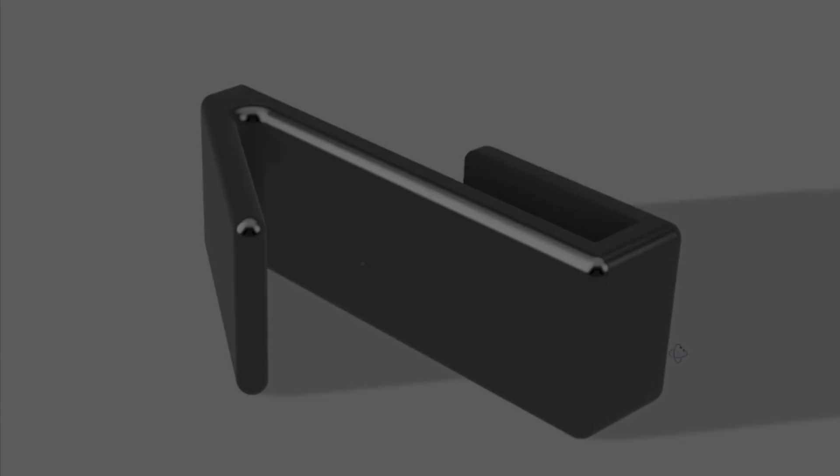If you're here, you're looking to start using Fusion 360. I have not used Fusion 360 very much, I've done a little bit of tutorial stuff on YouTube. I'll put some links to those guys' videos in the description because they've been super helpful.

A little bit of background about me: I am an electrician, but I do a lot of two-dimensional CAD work for electrical drawings and slab drawings for pulling conduit in concrete slabs. I've been off work for a bit, so I've been trying to find stuff to do, and I got a 3D printer and started designing stuff.

I actually started out with an application called Shapr3D on my iPad Pro with the Apple Pencil, but I just recently built a computer, and Fusion 360 is free for personal use, so it seems like a more long-term and more broadly useful skill to know Fusion 360 over an Apple app.

So from what I've learned, you can follow along with me. If you want to go download Fusion 360, you don't need to pay for it as long as you're not using it for commercial purposes.

And you can make some stuff for your home. If you don't have a 3D printer, you can send designs out to a 3D printing service and they'll send it to you. Obviously everybody's financial situation is different, but the Bambu and Creality printers are really pretty inexpensive, considering you can make pretty much anything your heart desires.

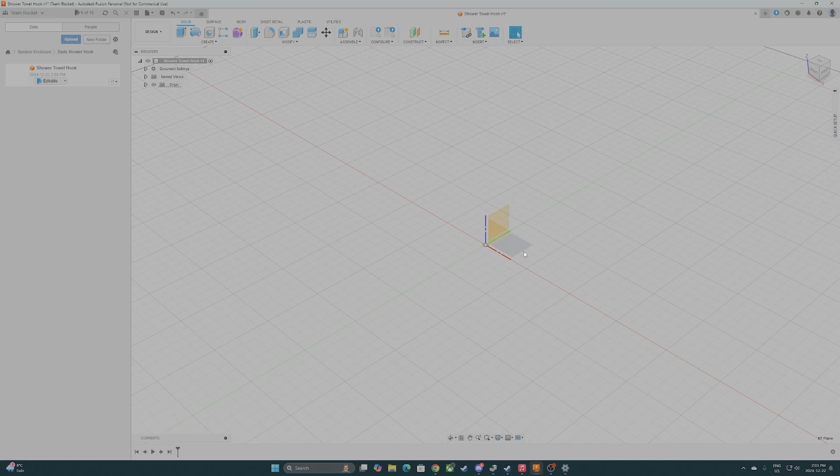So we're going to want to click on Origins, click there, right click, create sketch, and that'll put us into the top view, as you can see up here. He actually only gave me one dimension, which was that the glass is 8 millimeters.

So we're gonna kind of make a U-shaped hook that will form to that, so you can hook it on the top of it and hang towels up.

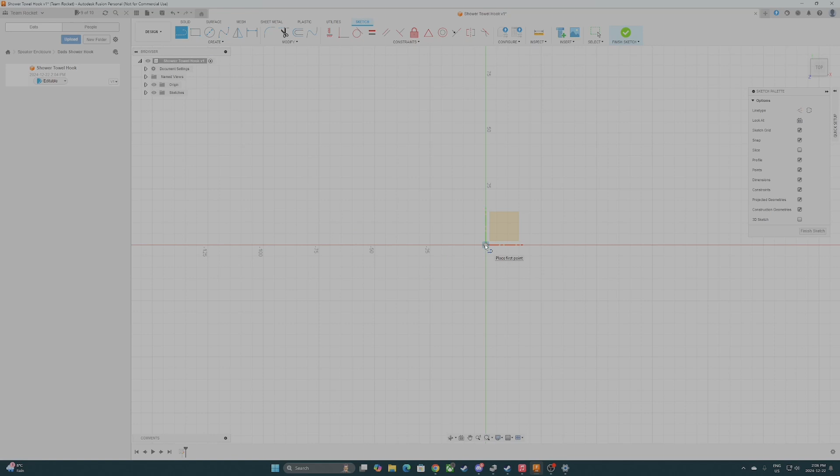Obviously, I'm not very good at using Fusion 360, so maybe we'll go for the line command, and we'll start from the crosshair, the planar crosshair here, and you'll notice I have snaps on, so you'll see it snapping to grids and center points as we go forward.

So just hover your mouse on the plane you want, the direction you want to draw, and the piece of glass is 8 millimeters thick, so I don't think the hook needs to be more than, let's call it, 32 millimeters. So you just hit that.

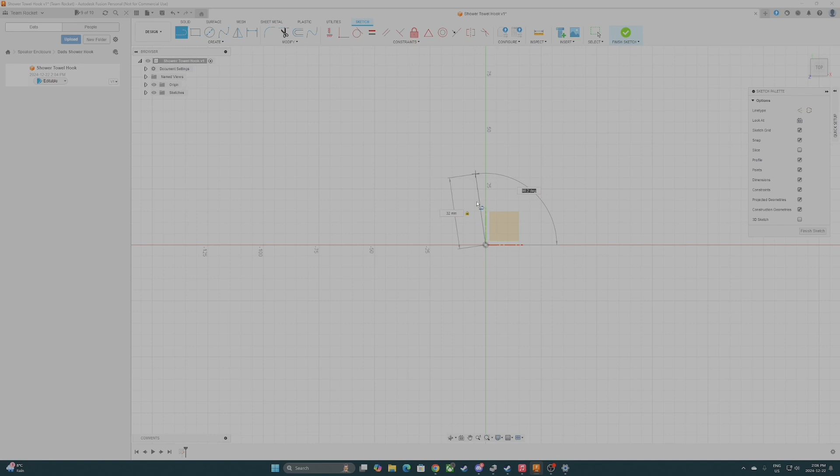You can hit tab if you want, and that'll lock the length, and then you can pick the angle you want. I think we want ours to be straight, so we'll just click there.

And then we need to pick a thickness, let's call it 4 millimeters thick. So because it's 8 millimeters of glass plus the two 4 millimeters, we're gonna go 16, we'll call it 16 millimeters. So we'll put 16 there, enter.

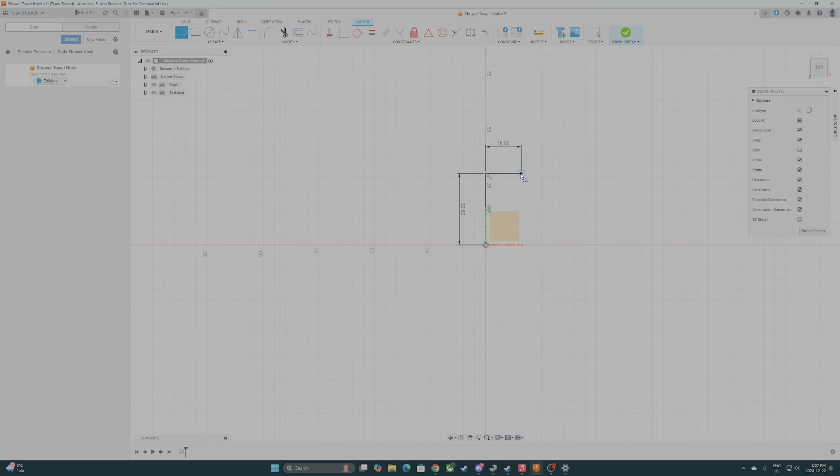You don't have to hit enter because you can continuously draw. And then we want it to come down maybe twice as long, so we'll call it 64.

So this is going to be the outside shape of it. We're going to have a hook come off here, and then we'll trace the inside of it.

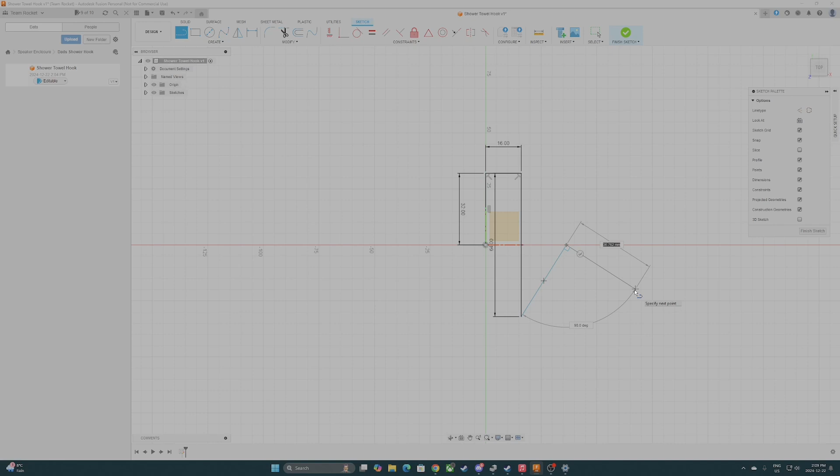So this is where that tab, once we pick the length of the hook we want, at an angle, we want it to come up to halfway. So approximately, that looks like a decent angle for that. We'll go ahead and click that. And since we said we wanted it to be 4 millimeters thick, we'll hit 4. Look at that. And then again, now we'll come down and we'll be perpendicular to that.

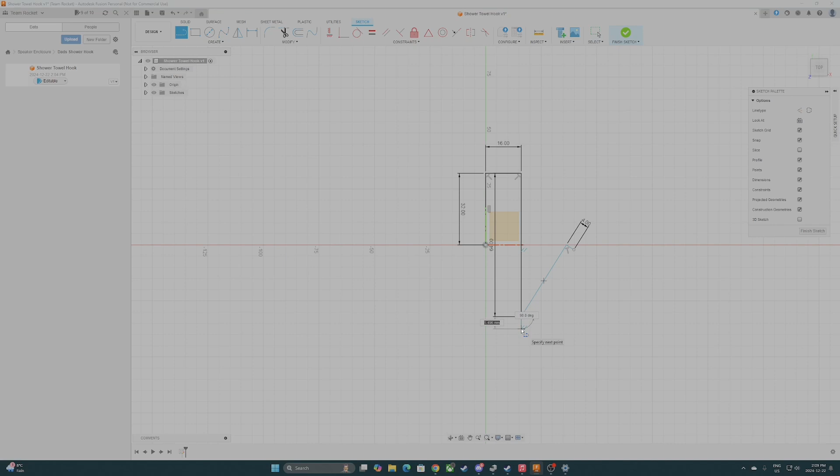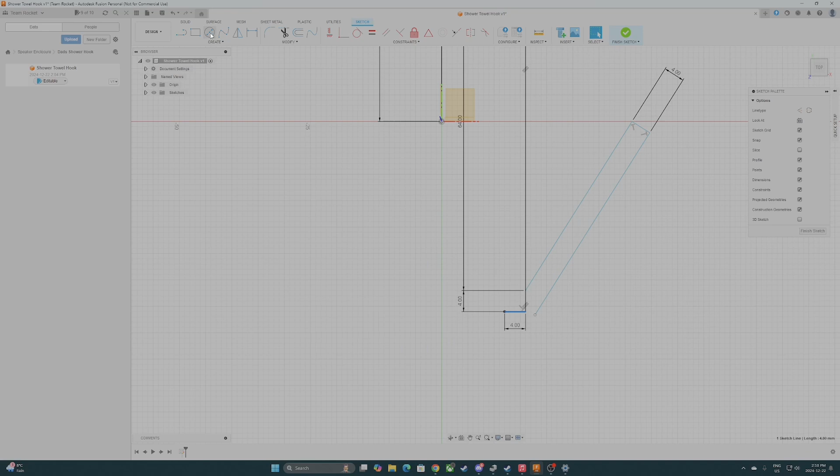This is where a little bit of math and thought can go a long way. We'll just draw a line down here, and then we'll come off of this point, and we'll go 4 again. And then we'll pull a line off of that's perpendicular, and we'll drag that line out till it's just drop it there. Pull a line from there and snap it into...

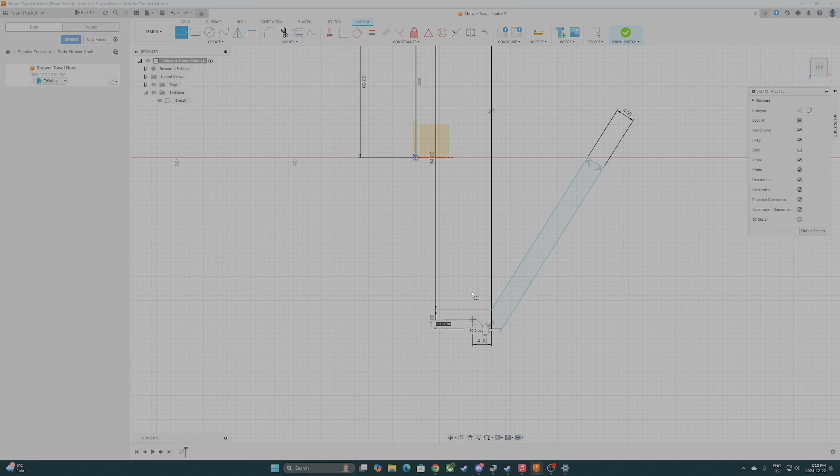Okay, so we've maintained the 4 millimeter thickness here. From the tightest point will be 4. Now we can draw a line and come back up. And since we went 64 up and we're trying to put a 4 millimeter thickness in, we'll go up 64. It still says 64. Okay, bad at math, go team.

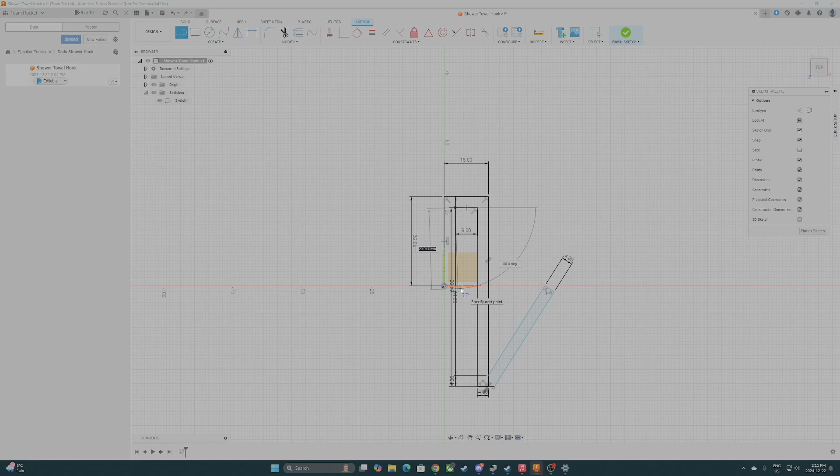So the top is 16. We want to take 4 and 4 out of that for this and this to get our horizontal line here. So we know the inside is meant to be 8. Now we can pull the line down, and that's now going to be 28.

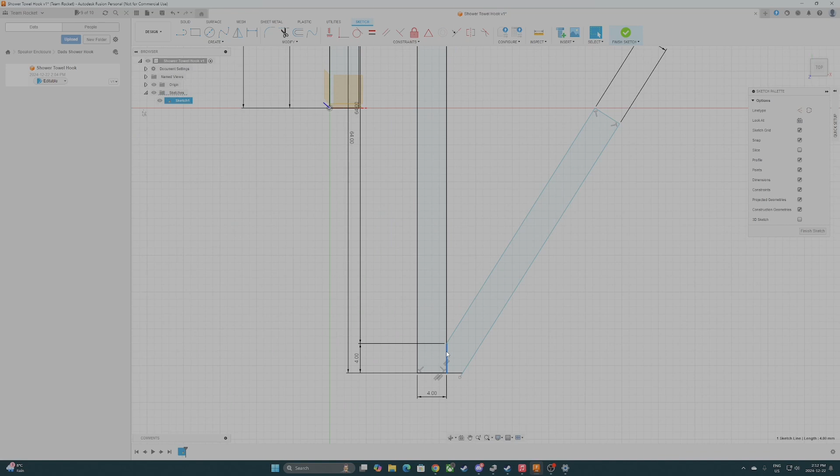Now you can see as soon as we snap that in there, we've got an inside. So the issue is this line, delete that, and now we've got one solid piece. So now we want to extrude it, and for that we can just hit E, and we can pull it out.

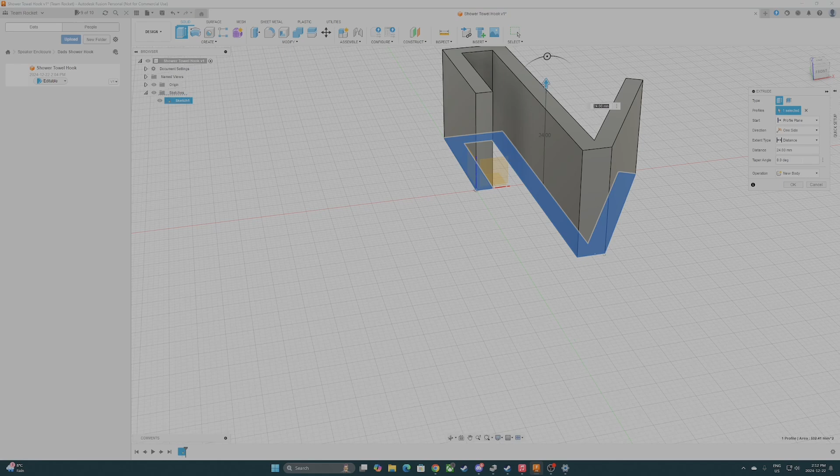You can sort of get a vibe for how thick you want it. I think 24 millimeters is probably good. Settings look all right. Okay.

Now we're gonna want to put some fillets on this, but I don't really want to fillet this inside, either of these inside corners, because I want it to fit fairly tightly to the glass, and the glass is pretty solidly cut, so I think it would be fine to leave that in there as unfilleted.

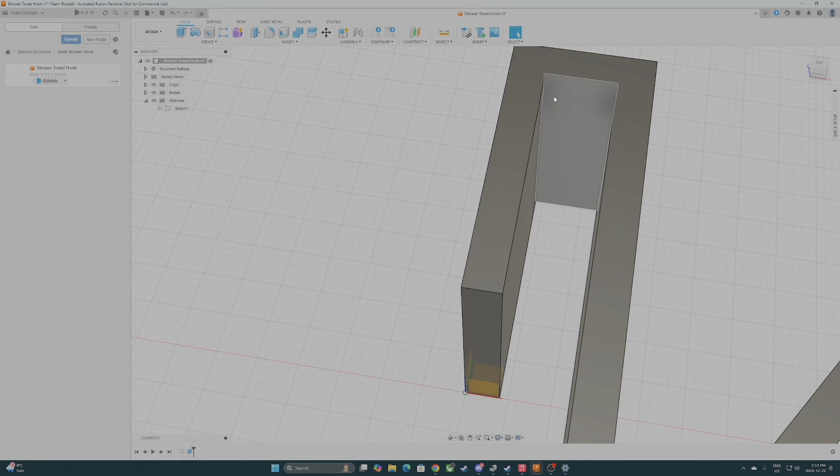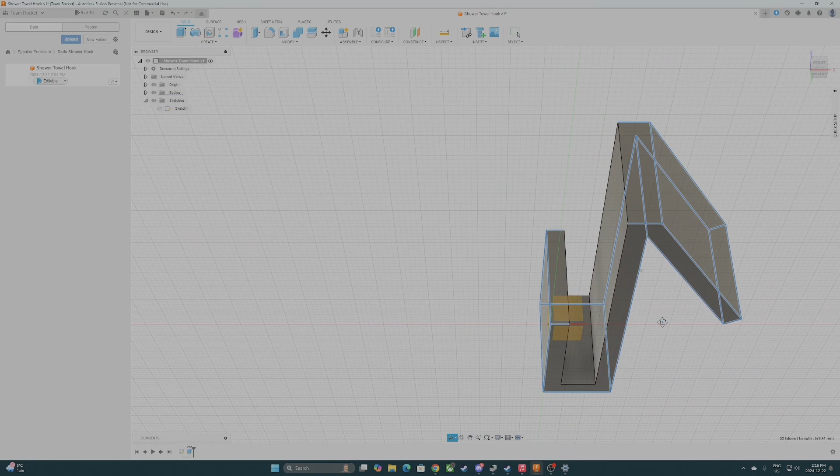So we're gonna have to go through and hold shift and click on all of our faces that we do want to fillet. I don't even want to fillet this whole inside because it's going to be touching the glass. So let's pretty much fillet everything that's not touching. It looks like we've got all the faces we want to fillet.

Nice, so now we'll hit F. Excellent. And we'll throw some numbers in and see what kind of fillet we get. One thing I learned early on when I was using Shapr3D, not that it was application specific, but the printer only has so much definition on fillets. So if you do a 1 millimeter fillet, it's not going to probably end up looking the way you want it.

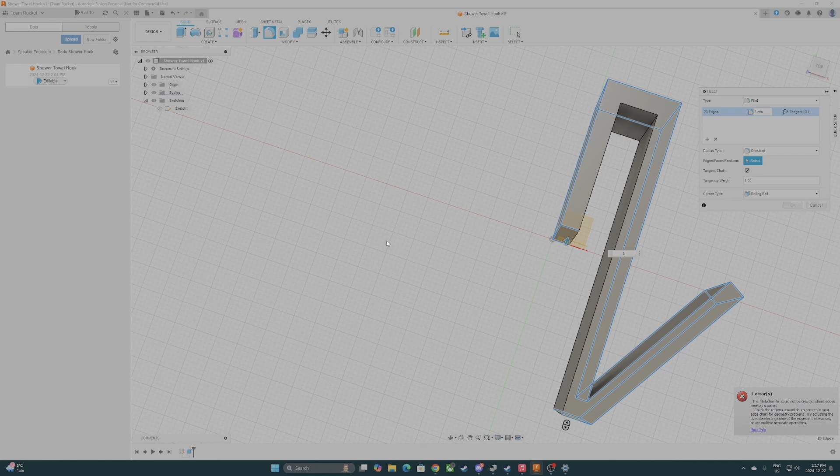So let's try a 5 millimeter fillet. Fillet cannot be created where edges meet at a corner. So it won't even let me do it. Perfect. Okay, so let me do a 1.

Let's go for a 2. Yeah. I like that. See, it stayed flat where it grabs the glass.

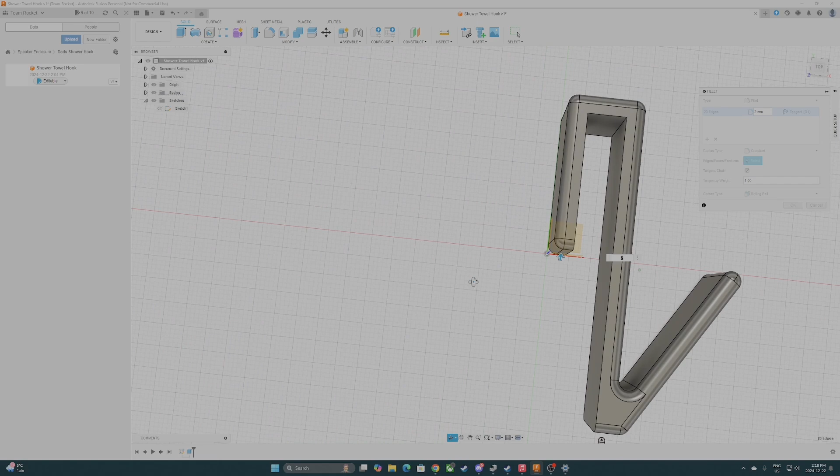Yeah, I like it. So now, first of all, we'll click OK. And we can turn the origin plane off. We want the body on. We can turn sketches on and off.

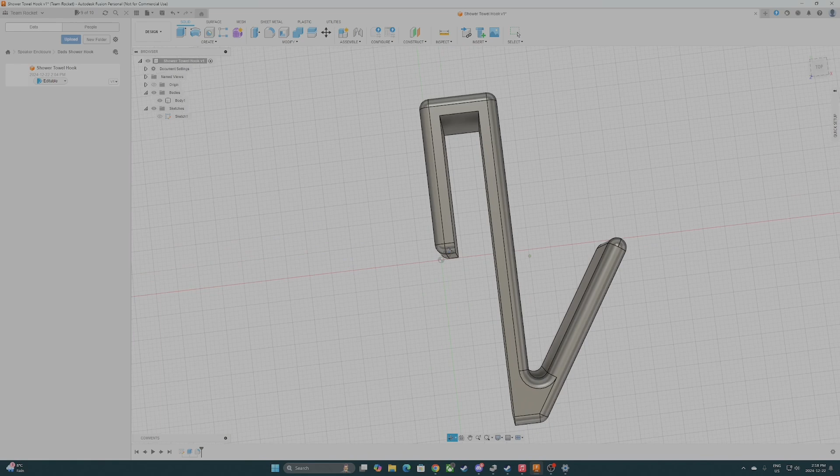And now if you want to see it rendered, stainless steel.

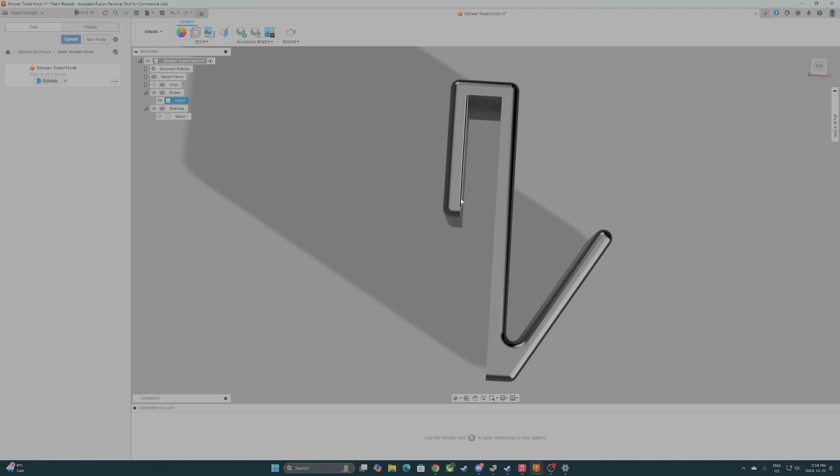So that's pretty much it. Now I can put this into my slicing software, and this is probably the best orientation to print it at, because your layer lines are going to cut through this way. So when your towel's on the hook, it's going to be forcing this to try to open up.

Whereas if you printed it at this orientation where the lines cut through, you'd see right here is going to be a really weak point, especially when you figure someone's going to pull on a towel here and it's going to try to split the layers right there.

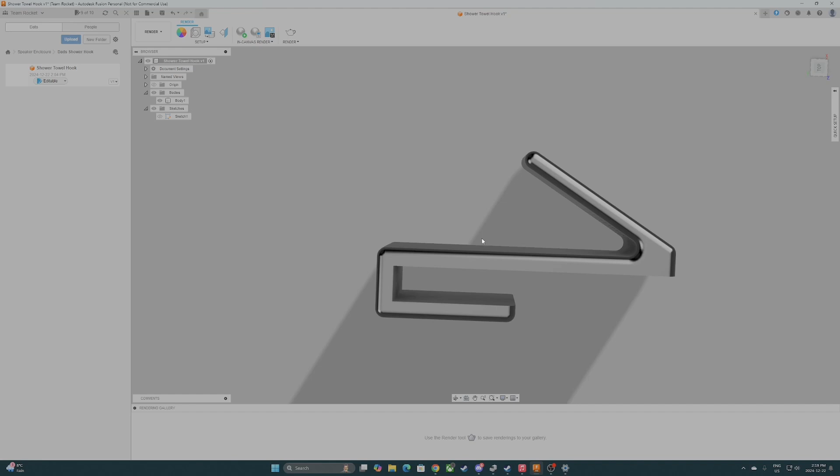Might not be a problem if you have really strong layer adhesion, but in my limited experience I find print orientation is really important, and often you end up having to design around the orientation if you don't want to split your parts in half.

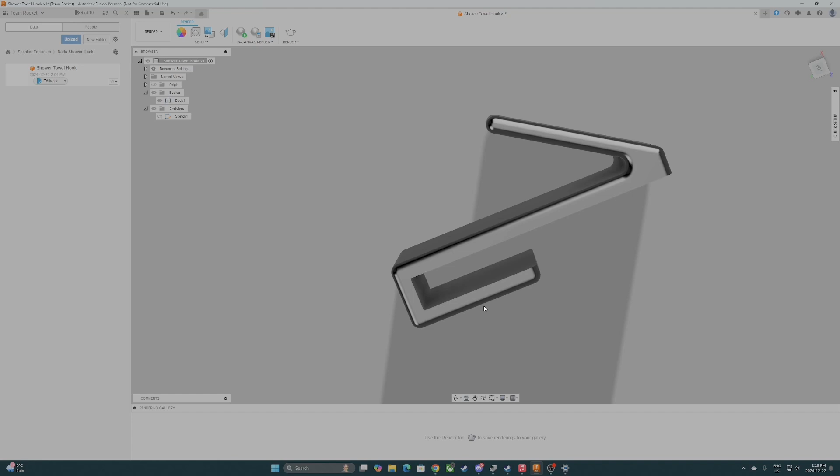For example, if this was unprintable without crazy overhangs and you needed a nice finish everywhere, you might cut this here and print it on its back with this face touching the print bed, segmented through here, and then print this on its back so there's no support.

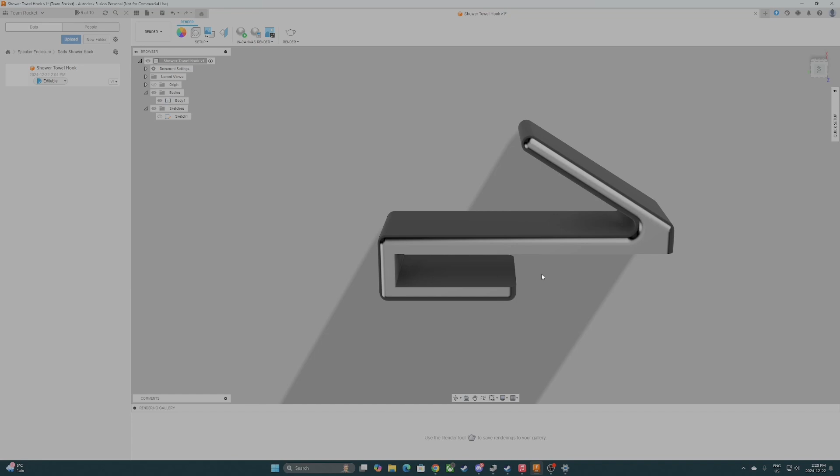Because if you printed this in any other orientation but on its side, you're going to need some kind of support and you're going to compromise on layer integrity. So just a thought for slicing.

So when we're done, don't forget to save. We'll call it complete V1, because who knows, we might do some changes to this based on how it prints and what my dad thinks.

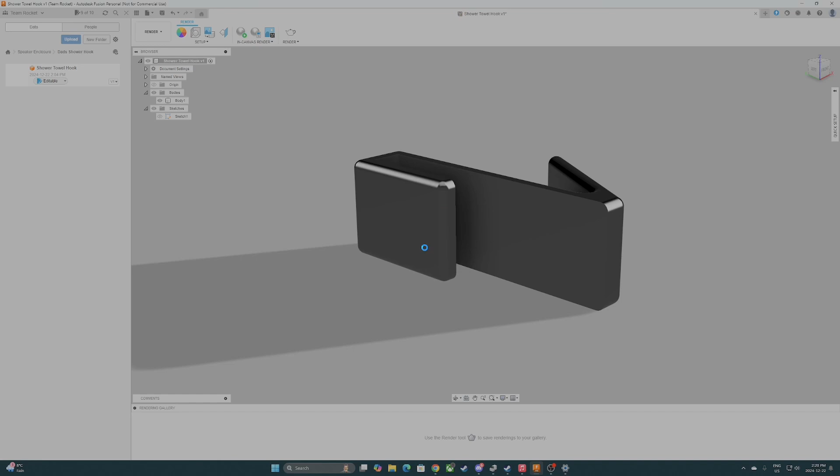Thanks for watching. The next part of this will be slicing it and a time lapse, and a follow up on how the print went. So thanks for watching.

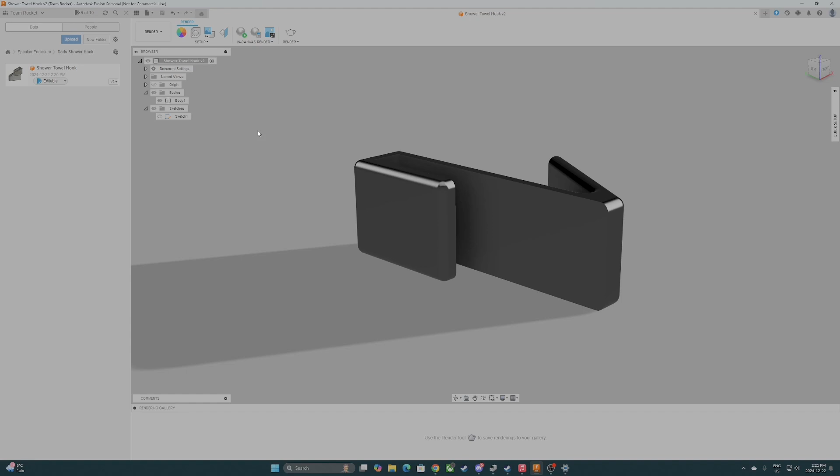So it's not that bad. There's obviously, the workflow of it is different to two-dimensional AutoCAD and even Shapr3D in regards to your history.

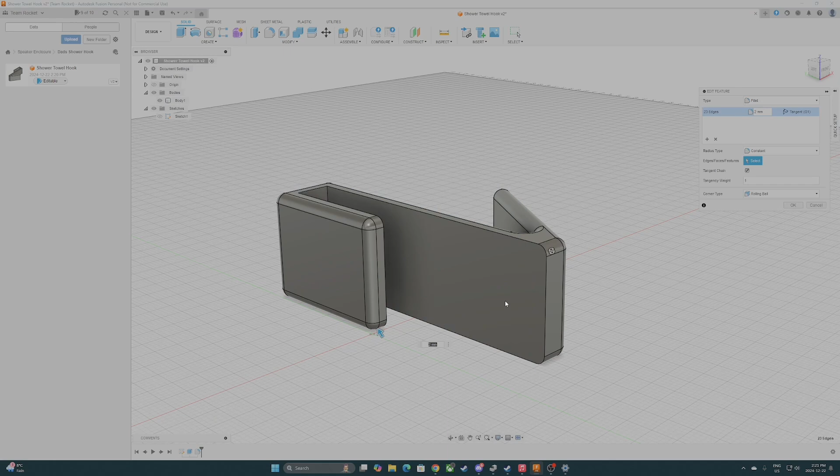For example, is a big one where we started with the sketch, then we made the body, then we did the fillet command, and that's one of the most impressive parts of using Fusion 360 to me - you can right click on this, edit feature, and go back and change the fillet. So it's really not hard to change stuff.

Obviously there's a limit to that. If you start changing drawings, then some of the later steps you took, as your project gets more complicated, you're going to start breaking stuff.

But at least Fusion 360 will give you a little pop-up, and your timeline item that has a problem will shade itself yellow, telling you you need to fix it. And that could be as simple as undoing the command you did and then reapplying it to fix it.